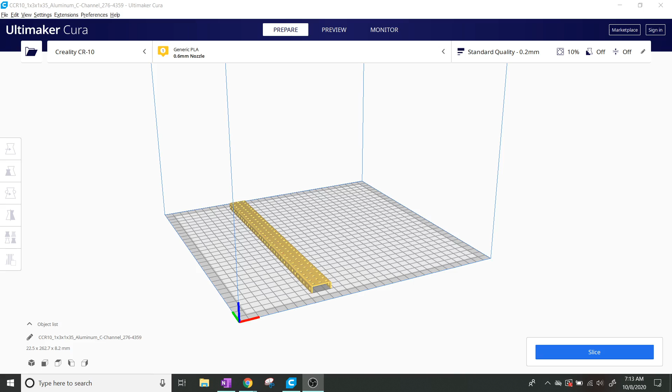So the reason why you would need supports is you've got to remember that a 3D printer prints one layer at a time, from the bottom to the top.

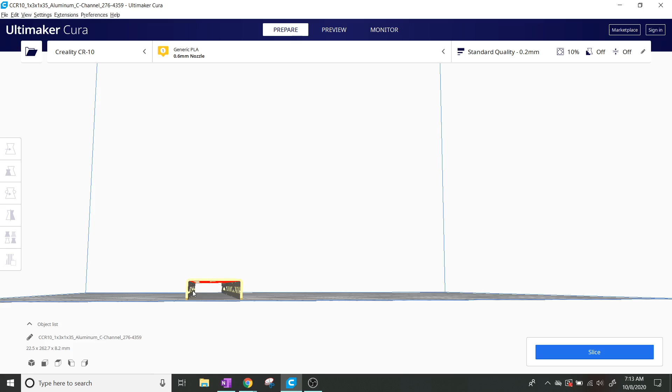Let's say I have this shape right here, this C-beam, and I want to print it. But if I look at the 3D model, there's this big open space right here in the middle. So it'll print the left side and the right side just fine, one layer at a time. But then when it gets to the top layer, it's going to try to put plastic in open space, and it's just not going to work. The plastic's going to fall because of gravity, and you're not going to have a C-beam when you're done.

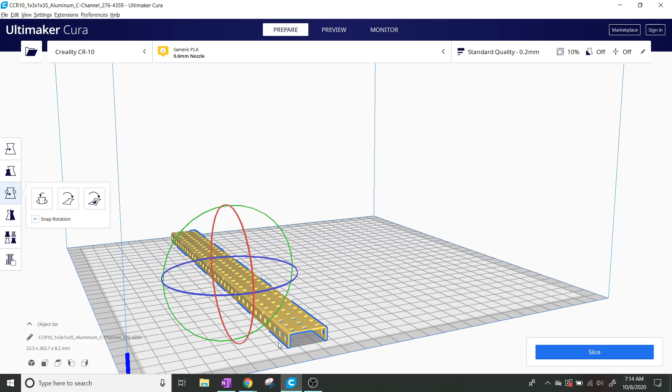So the most logical thing to do is to look at your shape and say, well, I could really just take this shape and twist it over on its back, and then it would print out the bottom part and then the sides just fine. But if you have a piece that can't do that, if no matter which way you turn it, it still has something hanging off to the side, then what you need to do is add supports.

So here's what we do. Go to the top right where you see the standard quality - this is the settings. If you click on it, you'll get a window that comes down. If you don't have all of these things in your print settings, there should be a button that says custom down here in the bottom right. Go ahead and click on that button if you don't have all these different options.

So we're going to find the one that says support, and you're going to click generate support, and it's going to give you a couple of other options. I would recommend that for beginners, you do support placement everywhere, and that you have the support overhang angle at 60 degrees.

The lower you make this angle, the more supports you're going to put on. The higher you make this angle, up to 90 degrees, the less support it's going to have. So 90 degrees would be the maximum, meaning I don't want any supports, and 0 means I want supports all over the place. You want a happy medium between the two.

This one, if you print it this way, which would be foolish, would take a lot of supports, but I'm going to show you guys what it would look like anyway. When you have it set to generate support and the support placement to everywhere, you click the slice button and it will process what it's going to take. It'll make the G-code for this. And you're going to check and make sure it actually made supports by clicking the preview button.

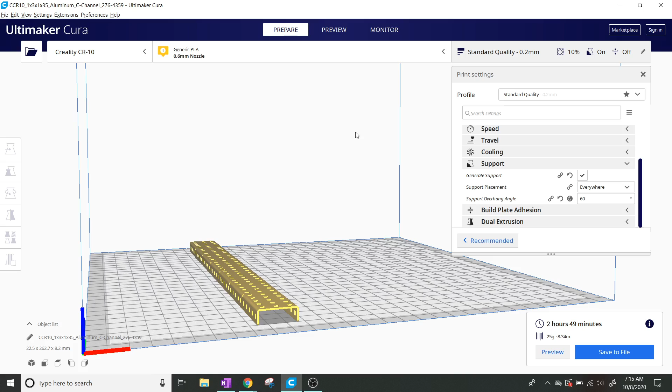So after it finishes - you've got to wait till it finishes - you're going to hit preview. And mine still seems to be thinking about it. My slow potato computer. Come on, potato computer, I know you can do it. There we go, so I'm going to hit the preview button.

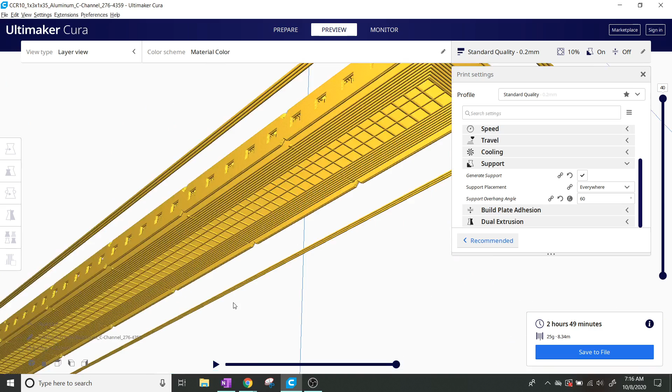When I hit the preview button, I can see that this spot right here is going to be filled in. All of this stuff underneath is going to have a support underneath, and theoretically you should be able to remove this easily because of the way it prints out. Now in this case, if you print it like this, you're going to have a pretty tough time getting these supports out. Once again, it is foolish to print it this way - you want to flip it around and print it the other way if you can. This is just an example.

Okay, hope that was helpful, and happy 3D printing.